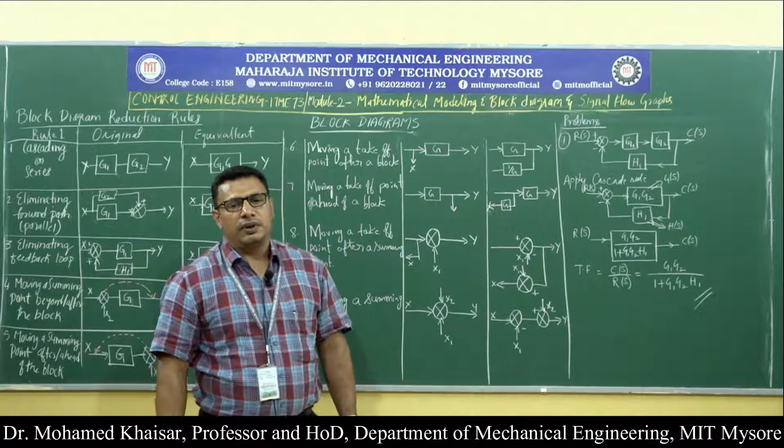What is G(s)H(s) here? It is G1 G2 divided by 1 plus G(s)H(s). G(s) is G1 G2 and H(s) is H1. So, the output remains C(s), input remains R(s). Therefore, the transfer function is C(s) divided by R(s) is equal to G1 G2 divided by 1 plus G1 G2 H1. This is the simplest illustration of the block diagram reduction rules.

Here you can see this problem demonstrates that a system is represented by two components inside it. There is a controller and there is a feedback device. R(s) is the input given to this system, which is processed by both of the components represented by the functions G1 and G2. Ultimately, we are going to get C(s) as the controlled output. Now, this output is measured by a feedback device with the function represented by H1.

This is fed to the controller or summing point or summing junction, and we have found that it is a negative feedback. That means whatever input has been fed to the system, the output is not proportionate to the input, in fact it is lesser. That is what it says.

This is the way in which we have applied the block diagram reduction rules, and finally we have arrived at the transfer function. What it indicates is that this entire assembly of the system has been brought down to a single block. That means the entire assembly functionality has been derived with the help of block diagram reduction rules, and we have got the overall transfer function as G1 G2 by 1 plus G1 G2 H1.

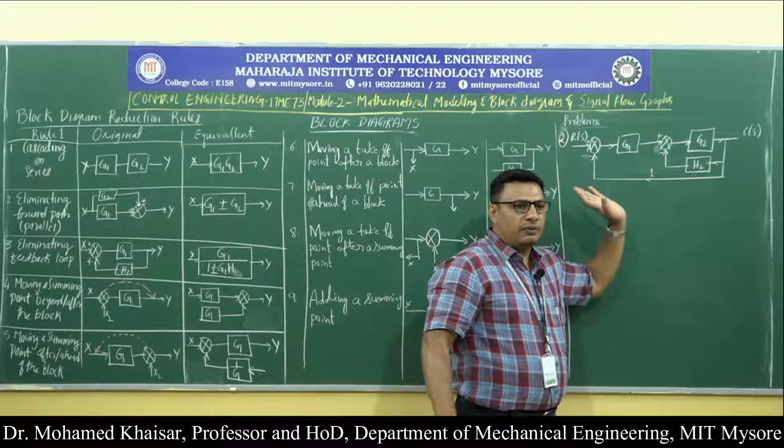The same remains the case even in the forward loop also, but very normally we will find unity in the feedback system only. So we will assume that as unity, and that is a universal principle. Now in order to derive the overall transfer function for this given system, how to solve? Let us try. See, this line is connected to this feedback signal. It can be rewritten as

rewritten in this particular fashion, right? Because since this is only the second problem, I must make more or less everything clear with you people, that this common line is common to both this feedback as well as this feedback signal. So I have just separated that and written it.

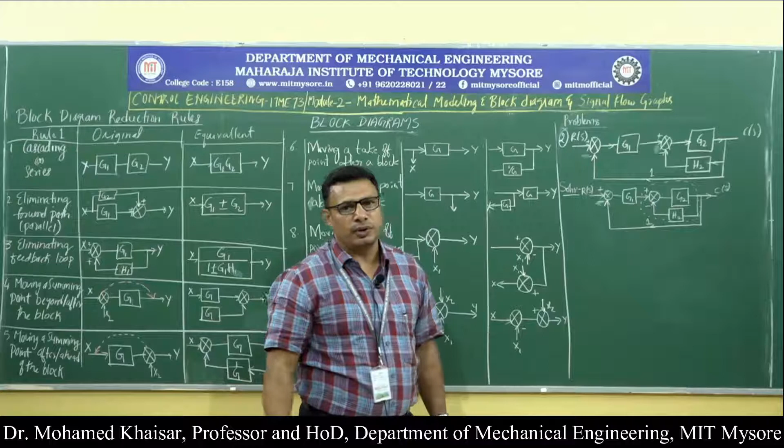Okay. Then next point is, if you observe over here, this part of the network, is it not resembling a simple closed loop control system or simple feedback system? Yes, it is resembling. So what rule can be used there? We can use eliminating the feedback loop. Yes, we can eliminate the feedback loop. So the very next step will be,

I am eliminating this. So G(s) is nothing but G2, H(s) is nothing but H2. So what could be the replacement? G2 divided by 1 plus G(s)H(s), that is 1 plus G2 H2. So this is replaced by a single block, and this remains in the unity feedback system.

Now, what you can see over here, these two blocks are in series, because of which rule number 1, that is cascading, comes into application. So therefore, these two should be multiplied. So G1 G2 divided by 1 plus G2 H2. This will be the next step.

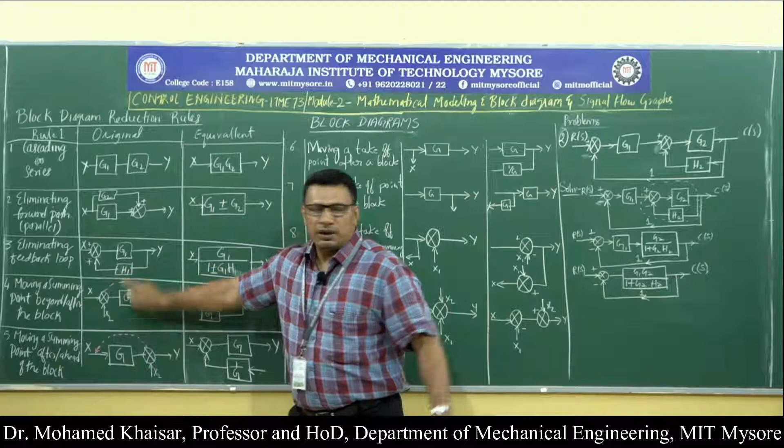Now, once you come to this juncture, this entire network represents a simple feedback system, as you can see over here. Only thing is, here H1 is present; there, since nothing is there, H1 is nothing but 1, so it is a unity feedback system. Therefore, in place of the entire thing, finally what you can write is this becomes G(s) and unity becomes H(s).

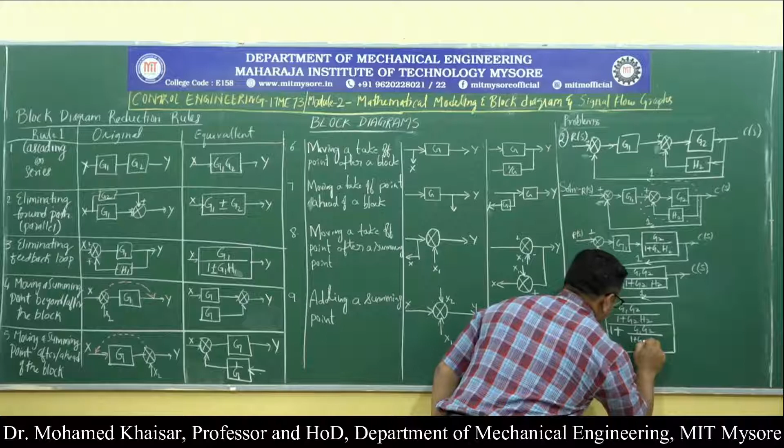So, G1 G2 divided by 1 plus G2 H2, whole divided by 1 plus G(s)H(s), meaning G(s) is the entire thing, H(s) is 1. Therefore G1 G2 divided by 1 plus G2 H2, this is G(s), and H(s) is 1.

So we got to know that this entire thing, from 2 summation points, 3 components and 2 feedback points, we have brought down to a single block whose content is the transfer function. And very normally the practice is that it must be simplified. If we try to simplify it, what can we get? I'll simplify this part, that is 1 plus G1 G2 divided by 1 plus G2 H2.

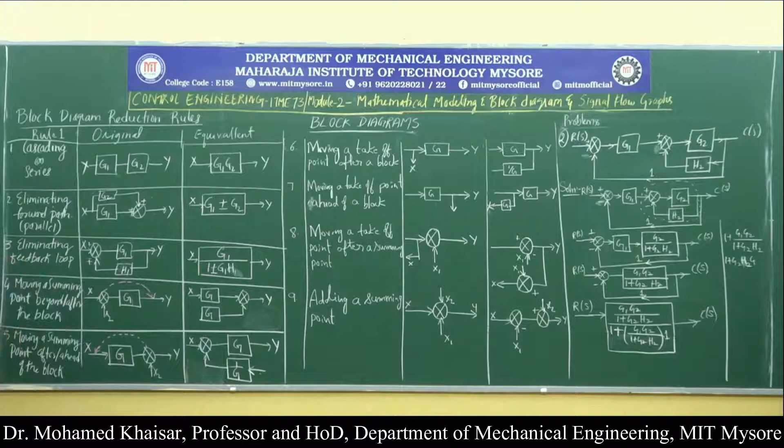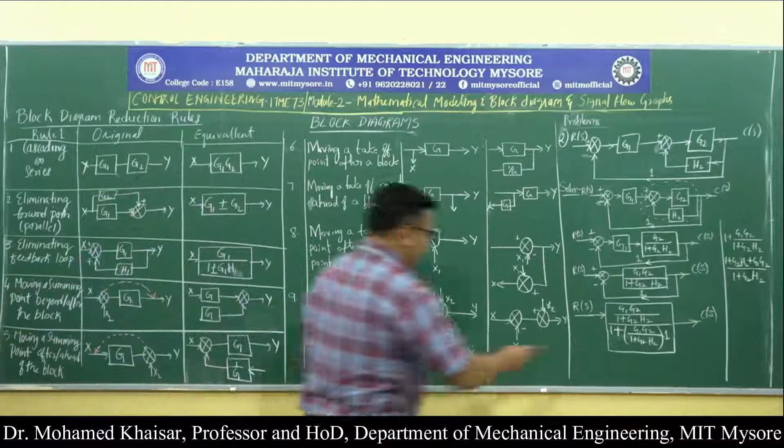If I try to simplify, I will get 1 plus G2 H2 plus G1 G2 divided by 1 plus G2 H2. This is what I am going to get. If I replace that over here, then this denominator and this denominator both will be the same, because of which the final transfer function will be equal to

G1 G2 divided by 1 plus G2 H2 plus G1 G2. This will be the overall transfer function for the given problem.